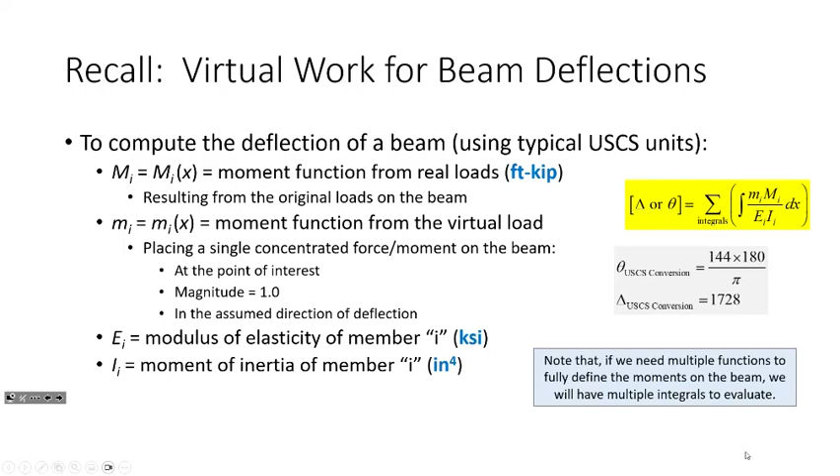Now just to make sure we're clear on the process: we're going to write both real moment functions and virtual moment functions for the entirety of the structure, and then sum up the integrals of little m times big M over EI. Last time we just had a single integral that we integrated across the entire span. That's not going to happen today—we're going to have multiple integrals we need to evaluate. The best way of learning how to do that is to just go through a problem.

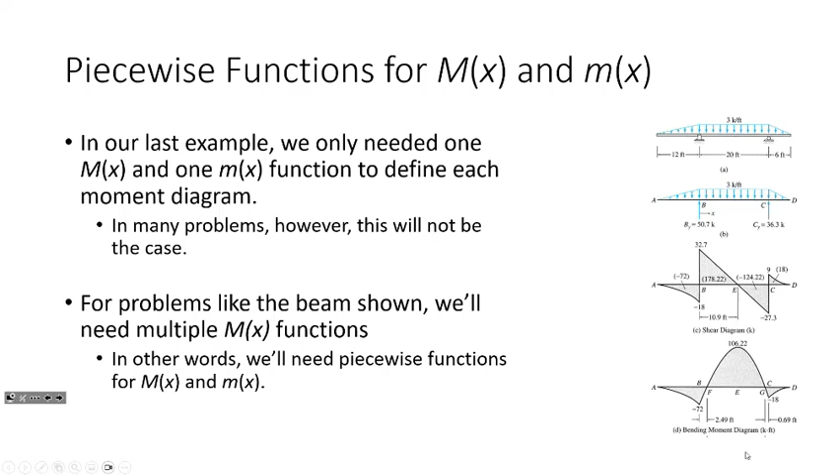You'll see what I mean today, like with this example. So speaking of, let's just get right into it.

Okay, so I have a fairly straightforward beam. I have a simply supported beam with a uniformly distributed load. I've given you the Young's modulus and the moment of inertia: E is 4,000 KSI and a moment of inertia of 6,000 inches to the fourth. We're talking about a beam that's probably a concrete beam, 4,000 KSI Young's modulus, so what is it, 57,000 square root of FC prime? Are y'all doing that in 321 yet? So you've seen that formula before. So about 4,000 KSI for E, 6,000 moment of inertia, and we have 1.2 kips per foot over a beam that's 30 foot long.

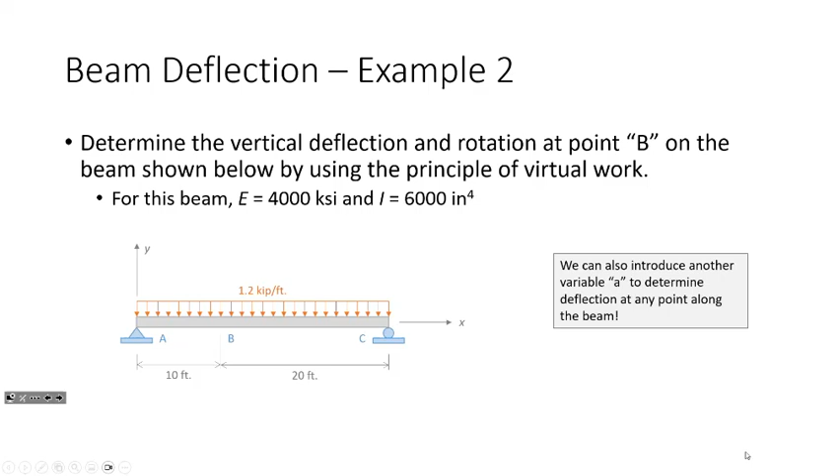So just making sure we're on the same page, how many real moment functions will I need to fully define the moment diagram? One, right? Because if I cut a section anywhere and look to the left, I have a distributed load and a reaction. So we're only going to need one real moment function, but that's not going to be the case with the virtual functions. Let's get right into it.

And I've got a couple things open here down below, and I'll explain all this stuff as we get into it.

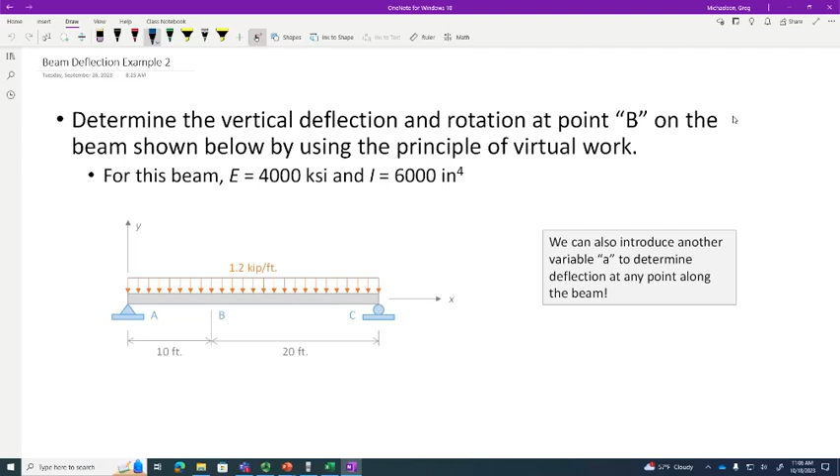Okay, so the first thing that we'll do is we'll handle the real structure. And the first thing that I would suggest is going through and doing the structural analysis normally, drawing the shear diagram and moment diagram graphically, so you can get an idea of what you're looking at. I think that's really important.

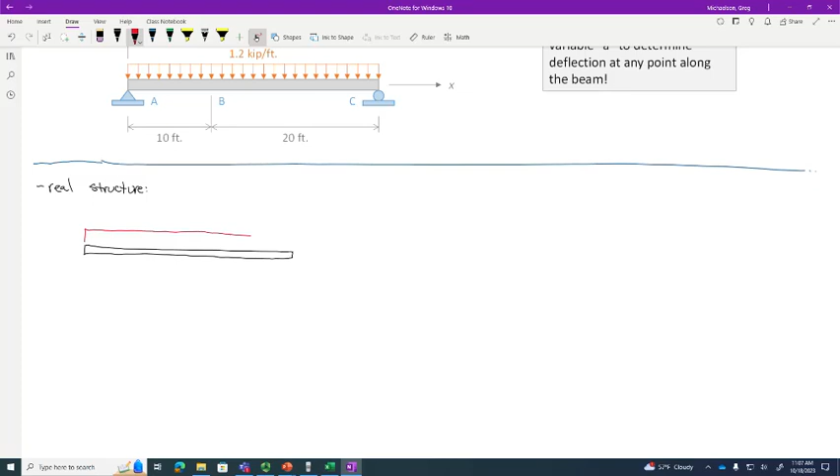So we've got a simply supported beam with a uniformly distributed load, 1.2 kips per foot. We have a hinge support and a roller support. Now, how many vertical reactions do I need to solve for? Two, right? One here and one here.

Can somebody tell me a characteristic about these two reactions? They should be equal, right? This is a symmetric structure. We're going to talk on Friday about exploiting symmetry and how it can make your life a lot easier when doing virtual work problems. But the point is, this is a symmetric structure, so these reactions should be equal.

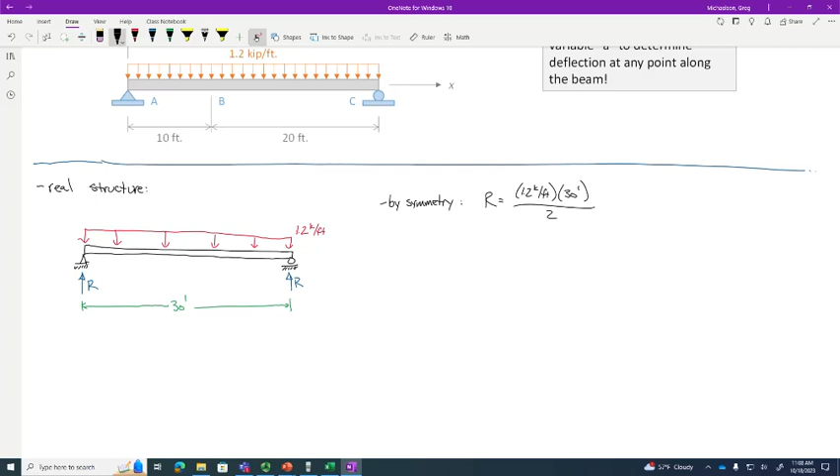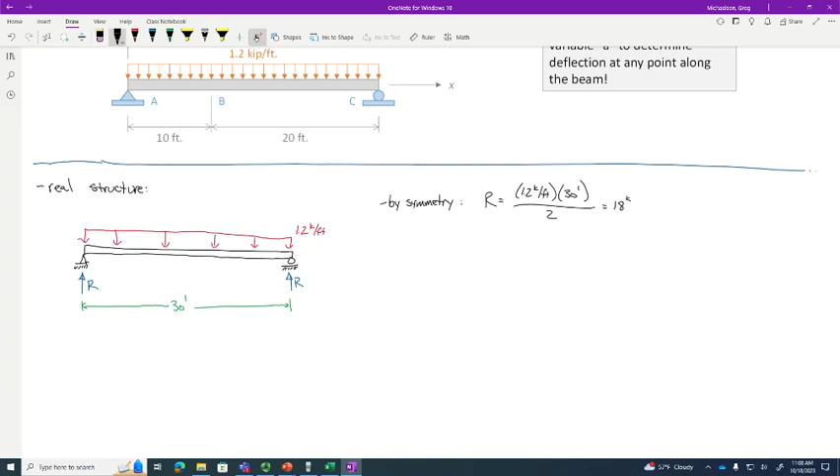Can anybody tell me how much the reactions are if this is a 30-foot long beam? It's 30 feet because if we look here, 10 and 20, so the beam's 30 foot long. How much are the reactions? 18 kips. Do I have a second on that? Yes, because by symmetry we can say the reaction is 1.2 kips per foot over a distance of 30 feet, and then we cut that in half, so that's 18 kips. That should be easy at this point, right? We haven't really done problems like that before, we've been pretty formal about it, writing our equations of equilibrium. But we are engineers, and just using your engineering judgment, that's going to be 18 kips.

So now I'll put 18 kips, 18 kips. Let's go through and draw our shear and moment diagrams.

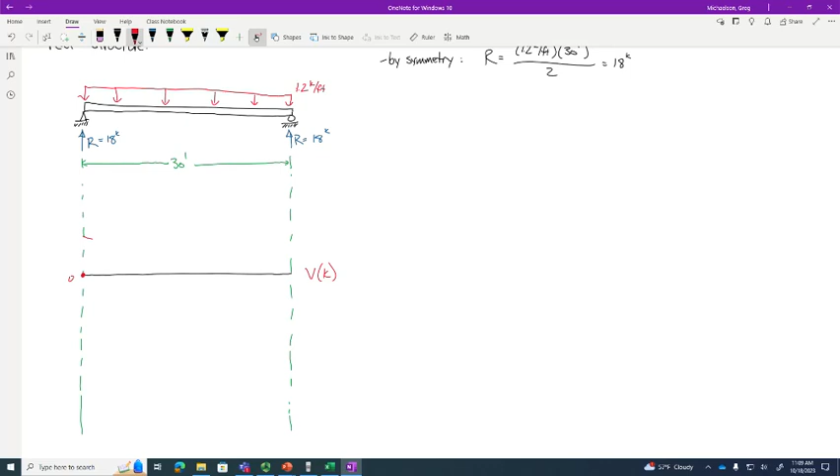So somebody tell me the shear diagram. If I start at 0, what does the shear diagram look like graphically? What's the first thing I do? 18. And then what's it going to look like from 18 all the way over here? It'll be sloped down to negative 18 and shoot back up to 0. Exactly right, so it's going to look something like this, 18, negative 18, and then shoot back up to 0. Just so we're paying attention, what's the slope of that line? There you go, 1.2.

If the beam is 30 foot long, how long is this? 15. So if that's 15 feet, what's the area under the shear diagram? What are the areas of these two triangular regions? 135. Do I have a second? Yes. So this is plus 135, this is minus 135.

So that means our moment diagram, what is it generally going to look like? A parabola opening downwards, right? It's going to open downwards and peak right here, because it's going to go a lot to a little, little to a lot. It's just going to be one big parabola that peaks right here. How much is that peak? 135. So our moment diagram is going to look something about like this, starting at 0, something about like that.

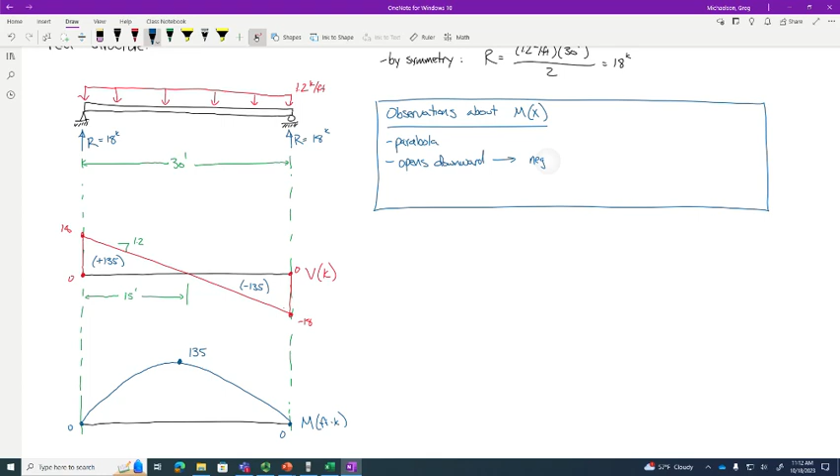First off, I think we can say it's a parabola, right? We can also say it opens downward. What does that mean? That means we're going to have a negative x squared term in it, right? Is everybody okay with that?

How about this? Let's just abbreviate that. How about that the function has to equal 0 at x equals 0 and x equals 30, right? The other thing is we know m of 15. That's going to be m max, and it's also going to equal 135.

So I didn't derive any equations, no x's yet, no cut sections. I'm just looking at the structure, looking at my moment diagram, and making some common sense observations. Everybody with me on that? And maybe one other point I would mention is it's a single moment function.

All right, so now let's cut a section. I'm going to cut a section and look to the left. Now I'm going to make a note about something. One of the things I was very fast and loose about is I didn't draw my coordinate system. I gave you the coordinate system on this problem, but on the homework assignment I'm giving you, it's not given. So you're going to have to figure that out.

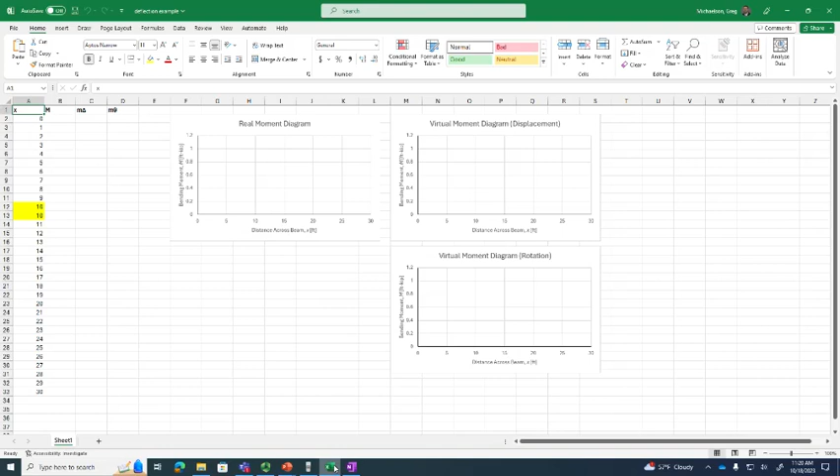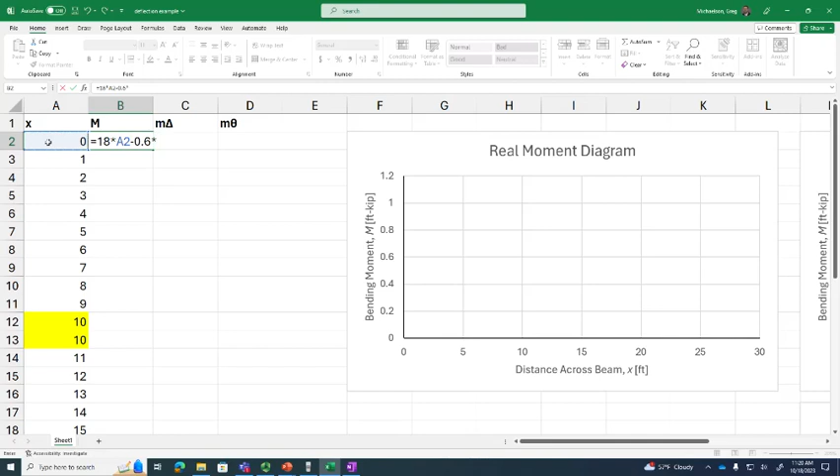Let's start plugging and chugging. So what did we say? We said m equals 18 times x minus 0.6 times x squared. And then, come on, boom. Does that look right? Well, we've got a 0 here, a 30 here, the max at 15.

What is the value at 15? It's 135. Everything's looking like it's making sense, right? You got this wonderful little tool, make sure that you avail yourself of it. Okay, does that make sense?

So now we have our real moment function. I'll put it up here on the board. So we'll say that m of x is 18x minus 0.6x squared. We evaluate that from 0 to 30.

Okay, so now we're going to do little m of x. Now what I'm going to do is I'm going to call it little m delta, because the problem, we're finding two deformations. We're finding a displacement and finding a rotation. So if we go back to the problem, what did the problem say? We're going to try and determine the vertical deflection and rotation at point B on the beam shown using the principle of virtual work.

So now what we're going to need to do is a virtual analysis. Let's do the deflection first, the vertical displacement first. So we'll find these m deltas. The way that works, we kick all of the original loads off the structure, and we replace it with a single unit load in the direction of the assumed displacement. On this structure, which way do you think B is going to deflect, up or down? Down. So we're going to do our virtual structure like this.

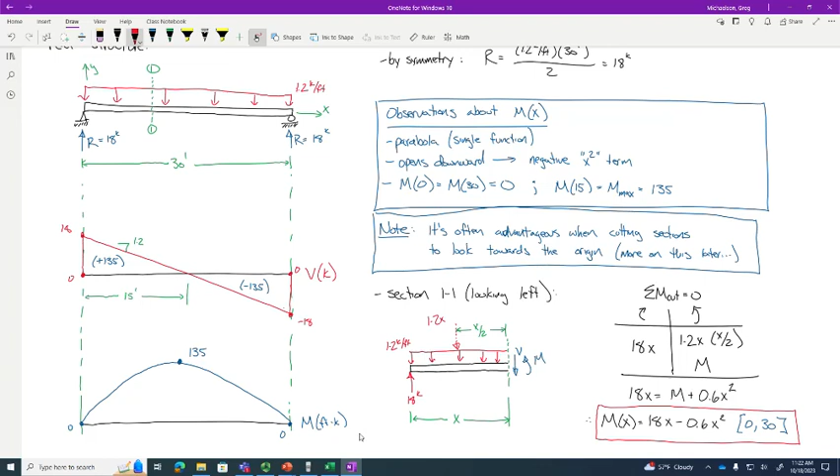So let's go back to this. Does everybody have all this written down? Okay. So now let's go a little further. All right. So, vertical or virtual structure. Now let's do vertical deflection at B. Okay, so we've got a structure that looks like this.

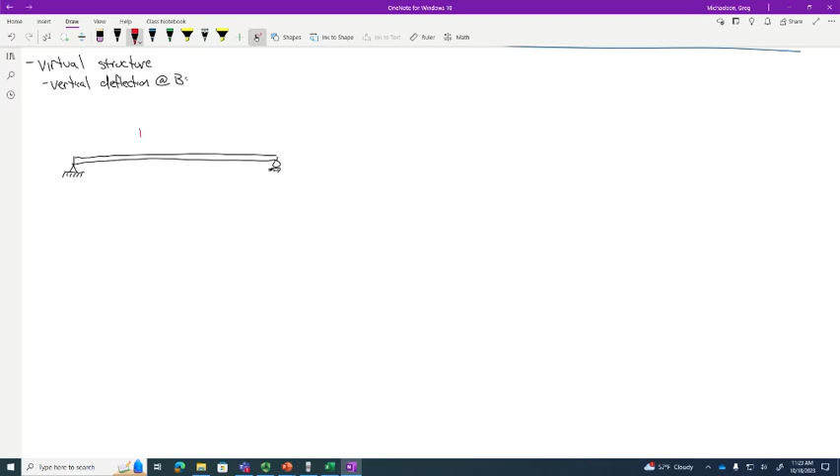Oh, I can do better than that. We've got our support here, and B was about right there. That's where point B is. And we replace that with a single unit load. So if you want, you can think of it as like a one kip load. Really, it doesn't have units, but if you want to think of it as one kip, that's fine. We have a one kip load, and that is placed such that this is 10 feet, and this is 20 feet, right? So this is my x-axis, this is my y-axis.

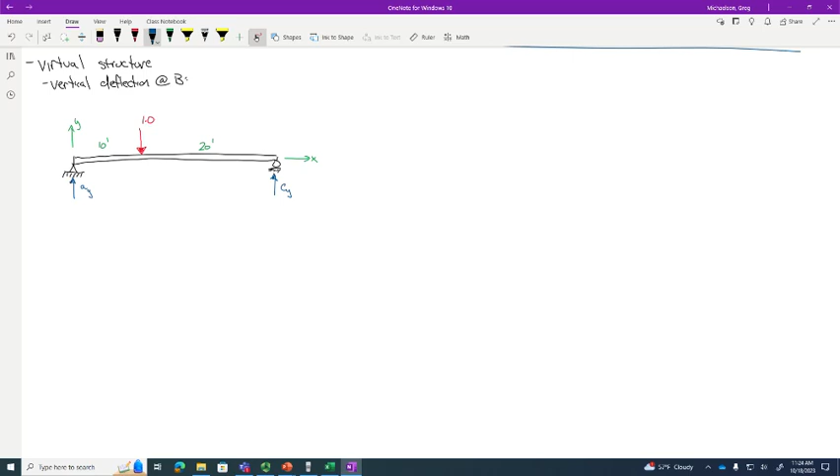So we're going to have a reaction here and a reaction here. Maybe what I'll do is I'll call this AY and CY, but I'll use lowercase letters because it's sort of a virtual structure since we're using lowercase for everything. So what I'm going to do, the way I'm going to handle this problem is I'm going to draw the shear and moment diagrams graphically. Okay, so first thing I need to do is I need to compute the reactions. So I'm going to sum moments at A.

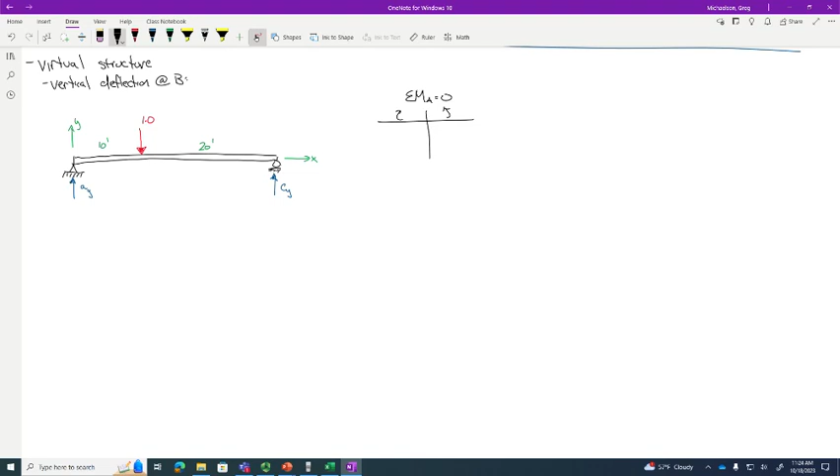Okay, so if I sum moments at A, what do I have? I've got 1 times 10, and I've got CY times 30, right? CY times 30. So I've got 1 times 10 feet is CY times 30 feet. Is everybody okay with that? So 10 feet is CY times 30 feet. So CY is a third, right? Did I do that correctly? So a third, okay, so we'll say CY is a third.

So equals. So if I sum forces in the y direction, y'all help me out, what is AY? There you go, AY is 2/3 going up. And again, it's not 2/3 kips, it's just 2/3. Again, if you want to think of it as a kip, that's fine, but it technically has no units.

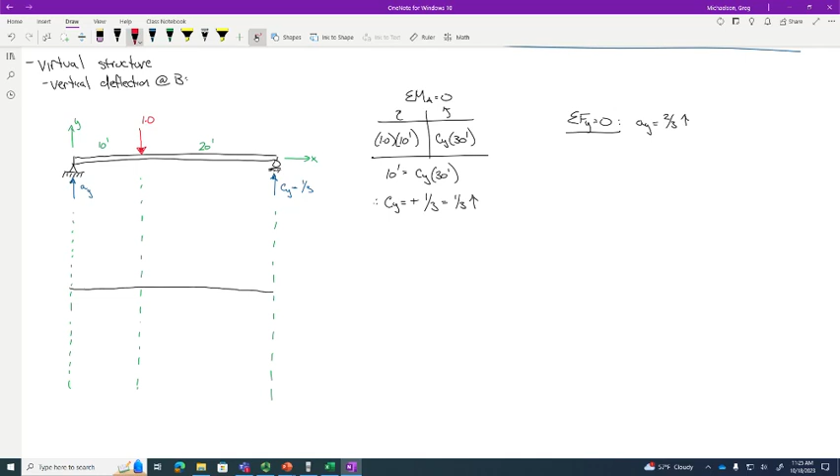So now what we're going to do is graphically construct our shear and moment diagrams. So let's start off with the shear. So the shear doesn't have any units. So we start out at 0.

So somebody tell me what to do. Start here, what do I do? Go up how much? Then what do I do from here to B? What do I do? Straight across, and then I go down 1/3... negative 1/3, then over to C, and then back up, right? So our shear diagram should look something like this.

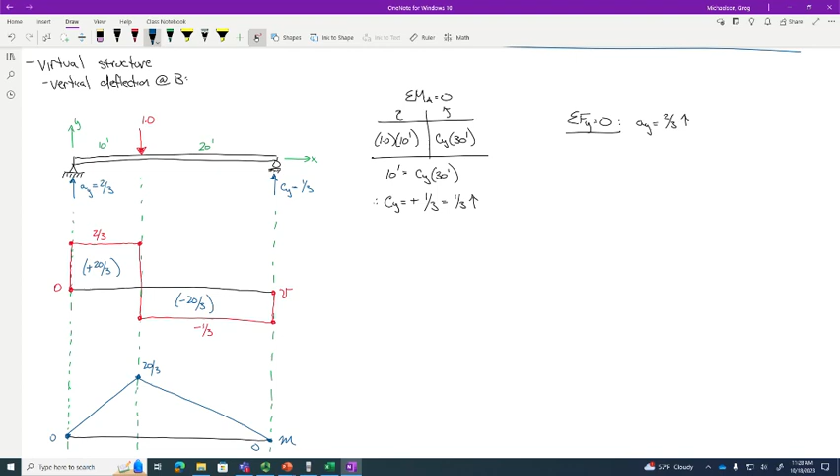Okay, so with that, I'm going to move these up a little bit.

Let's make some observations about M delta, just like we did last time. Last time we had a parabola that opened downward. Do we have that case here? So here what we have is a piecewise linear function.

And specifically, we're going to have two equations. We'll call it M1 from 0 to 10, and M2 from, sorry, not 20, 10 to 30. Does that make sense?

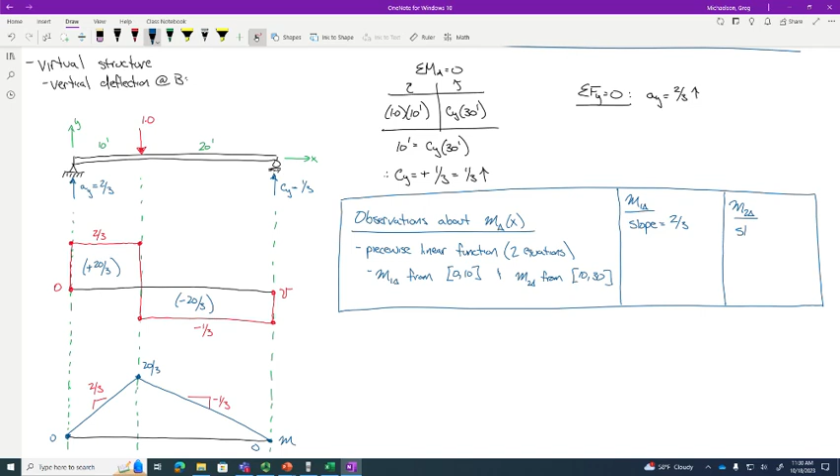So let's look at M1 and let's look at M2. What's the slope of M1? It's 2/3. The slope of this line is minus 1/3. Is that a fair statement? Okay.

Now, remember my coordinate system. What is a point that this line goes through? Give me a point that this line goes through, a simple point to deal with. 20/3, 10. Okay, 20/3, 10. What's an easier point? 0, 0. So what is the y-intercept of this line? 0.

So therefore, M1 is 2/3 x. Y equals mx plus b. That's the slope, that's the intercept. Y equals mx plus b. And this is from 0 to 10.

Okay, now this one. You mentioned 20/3 or 10 and 20/3 as a point that this goes through, but I kind of like dealing with zeros. Let's talk about this point. Is there a point that this one goes through that's easy to deal with? 30, 0. So this point goes through 30, 0. And so if you want, you can say, okay, y minus y1 equals m times x minus x1. Just sort of do that off to the side.

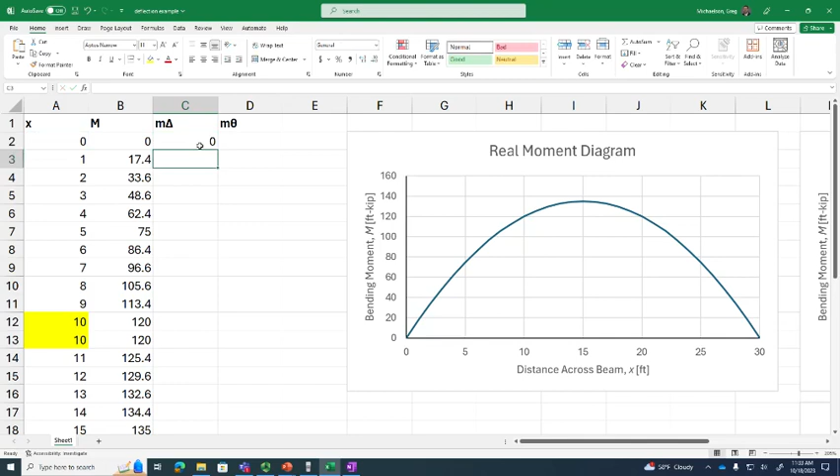So what we can do is we can write this as... make that a little better. Does that work? Do those equations work? Well, let's see. So we've got two-thirds times x. Zoom out a little bit.

So we're going to use that until we get right here. That one needs to go over there. So, and then here, 10 minus, like that, down. Okay, again right here we get the same value on both equations. So if we highlight this, this point's kind of special because with one equation and the other equation we get the same answer, but this is where the equations transition. Does that make sense? So we can graph it out and see that it makes sense.

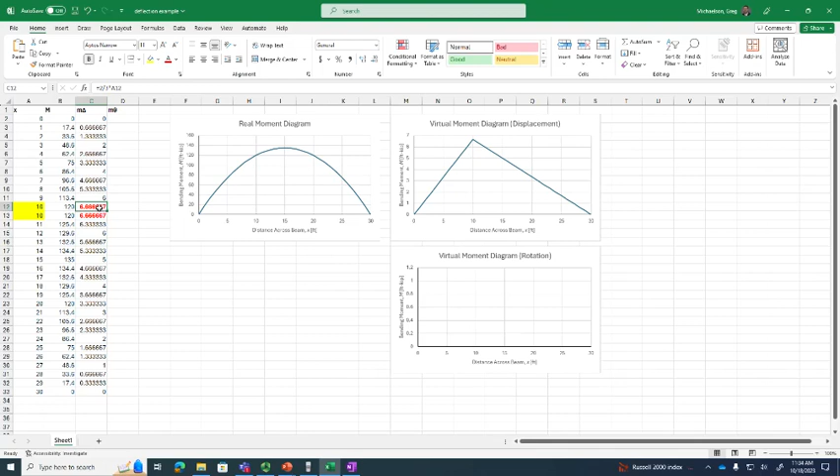Any questions? So now it's time to actually find a deflection. And so how do we do that? Well, we use the principle of virtual work.

Our principle of virtual work, we'll call it deflection at A, or sorry, deflection at B. We're finding the deflection at B, and we're finding vertical deflection. The principle says that we need to sum up our integrals.

But let's just make sure we understand what we're doing. What we're trying to do is sum up all of the stored energy inside the beam. Remember, virtual work is just a comparison between external work done and stored strain energy. So we need to sum up the little m times big M across the entire structure.

The problem is we have two little m functions. This little m function is only valid from 0 to 10. The big M works for the whole structure, but this one's only valid from 0 to 10, and this one's valid from 10 to 30. So the way we're going to have to do this is we're going to have one integral that goes from 0 to 10.

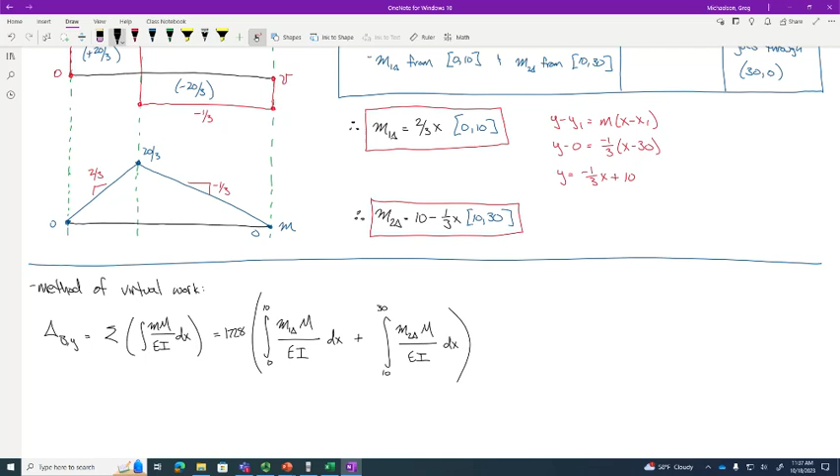So I've got 1728 over EI times an integral from 0 to 10 of 2/3 x times that dx, plus another integral from 10 to 30 of 10 minus x over 3 times 18x minus 0.6x squared, dx.

Now, my question to you as the class: let's look at this. That should not be anything you can't handle, am I right? And to be clear, I don't even really expect you to do that by hand. There's nothing to say you can't just... you have tools, use them.

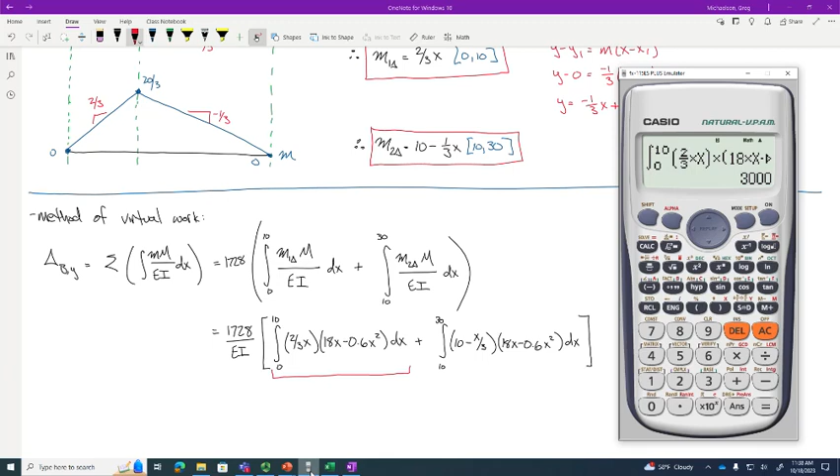In fact, for this integral, if you integrate from 0 to 10, 2/3 x times that, and plug and chug, you get 3,000. So this integral is 3,000. This other integral, I'll go ahead and tell you, ends up being 8,000 when it's all said and done.

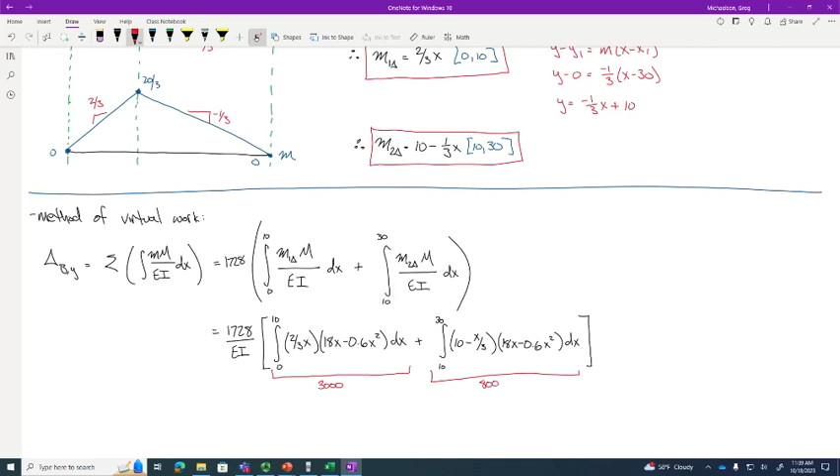So therefore, the deflection is going to be 1728 times 3,000 plus 8,000, all over E, which is 4,000, times I, which is 6,000. I'm being kind of fast and loose on the units, but we derived this unit conversion factor such that if all of our inputs were in our chosen unit system, the output would come out the way we wanted. So it kind of works out for us. When you chug this out, you should get...

0.792. So therefore, delta B y is 0.792 inches downward.

Okay, I want to take a step back. Let's digest what we've done here. Does anybody have any questions on this? Anybody have any questions?

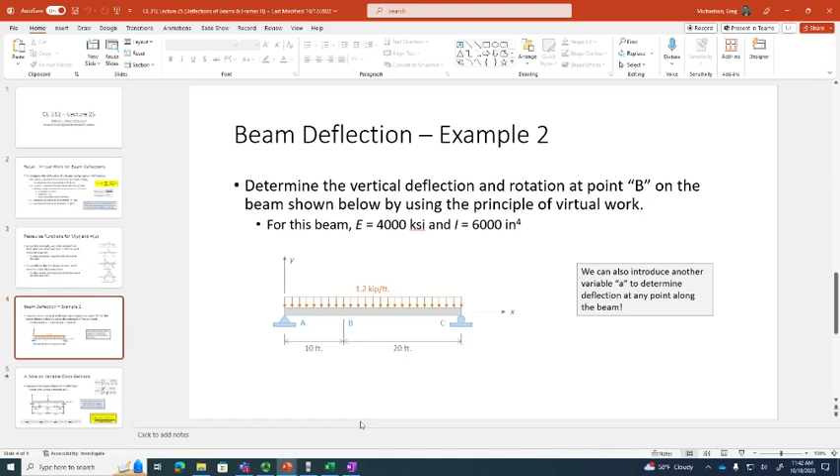So the idea is, here's what the beam used to look like, here's what it looks like now, so I'm proposing that it rotates like this. So what that means is when I look at my beam, I'm going to put a moment on the beam that looks like this. That's why I'm going to put the moment in that direction. So when I look at my virtual structure, let's draw that out right here.

So we'll call this the virtual structure. Let me go down a little bit. My scroll's not liking me.

Okay, so what I'm going to do is pick that point and put a unit moment. Now, to be clear, if you do this analysis and choose the wrong direction—like instead of having the moment rotate clockwise, you put it rotating counterclockwise—if you assume incorrectly, what's going to happen at the very end?

Say it again—you're going to get a negative answer, right? So if I'm putting it clockwise, and you put it counterclockwise, you're just going to get a different answer, or a negative answer. Doesn't mean the magnitude's going to be wrong, just a negative answer.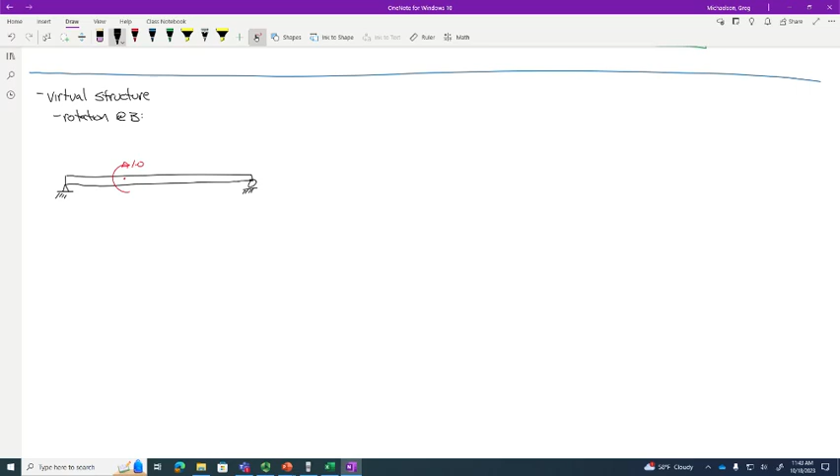Okay, so let me walk you through this one real quick. I don't think we're going to get to finish the problem, but I'll at least get through the difficult parts. Okay, so don't forget we've got our coordinate system right here.

And so, like last time, what I'm going to try and do is solve for the reactions. Okay? Now, I propose that the reactions are going to look a little different. I propose I'm going to have a vertical reaction right here going up, but I propose this one's going down.

And if you're wondering how I'm coming up with that—so I've got this moment. This moment is wanting to rotate the structure this way, so I propose the reactions have to rotate the structure the other way to keep it in equilibrium. That's kind of the idea. But if you don't believe me, let's do the statics, okay?

So let's recognize again, this is 10 feet, this is 20 feet—so 10 and 20, okay? So what I'm going to do is sum moments at A.

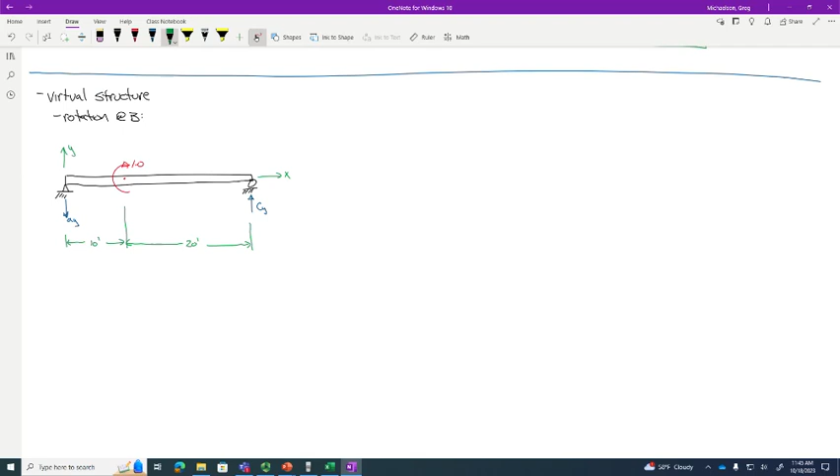So if I sum moments at A, I have this unit moment. So I have 1 times what? Nothing, right? It's a moment. You don't multiply it by a moment arm. You just do 1, right? Because you're just summing moments, right?

So I have 1 right here, and here I've got CY times 30. Now I'm putting it on the right side because here that moment rotates like this, okay? So I've got 1 equals CY times 30. So therefore, CY is 1 over 30.

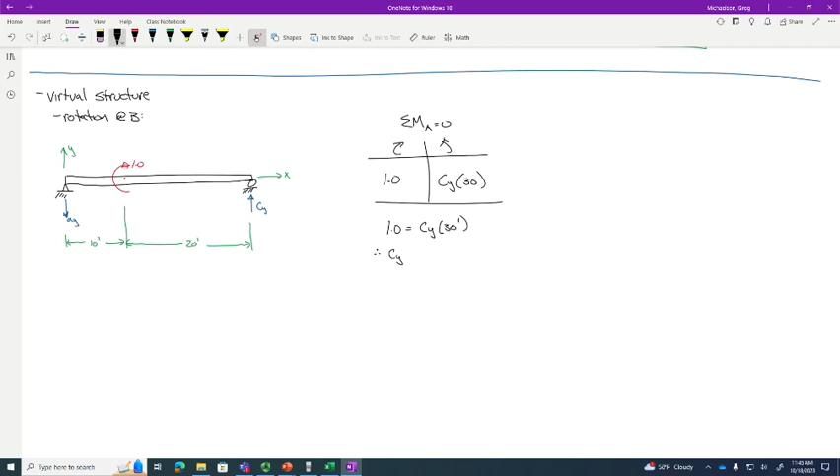So this is 1 over 30. But here's the thing—if that's 1 over 30 going up, what does this have to be in order to maintain vertical equilibrium? This has to be 1 over 30 going down, right? So that's where I have the two equal and opposite reactions.

So this is 1 over 30 going down. So here's what our diagrams are going to look like. Let's do that. So when I do this, we'll draw this line here too.

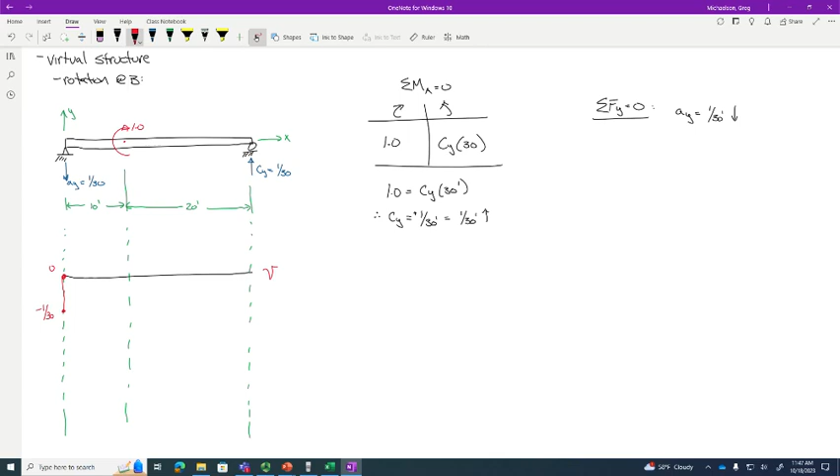So when I draw my shear diagram, what's going to happen is I'm going to start at 0, and I'm going to drop down to negative 1 over 30. But what's the shear diagram going to look like from start to finish? It's just going to be flat because that moment does not affect the shear diagram. Okay. All right, so far so good?

Now, I am going to break this up into different segments so that we can negotiate this. This is going to be negative 1/3, this area, and this one's going to be negative 2/3. So what I'm doing is splitting it up along that line. So the total area under the shear diagram is negative 1, right? So that moment has to cause a sudden increase of 1 in order to get us back to 0.

See, my moment diagram is going to look like this. So I'm going to start at 0, drop down to negative 1/3, shoot up to positive 2/3 because that's where my concentrated moment is, and then go back down to 0. Okay? And by the way, what's the slope of these lines?

Negative 1/3. Negative 1/3 or negative 1 over what? 1 over 30, right? It's the shear diagram, right? So this is negative 1 over 30, and this is negative 1 over 30, okay?

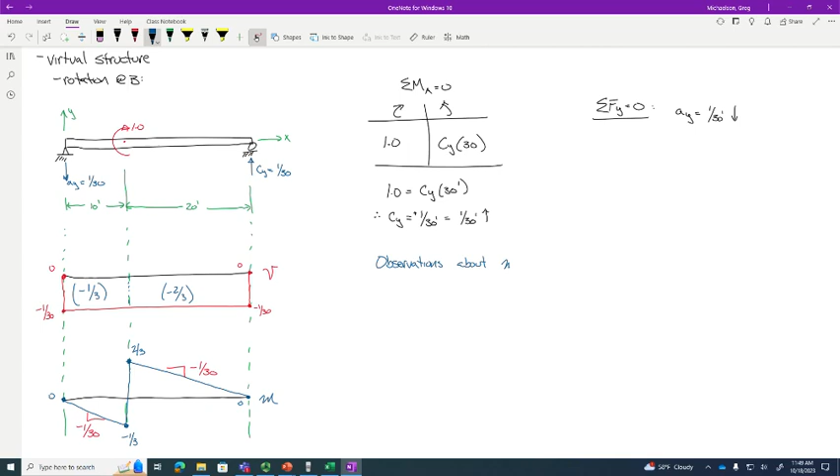So just to bookend this—and I don't think we're going to finish the example today, but I think we'll be able to at least make our observations—so just like last time, we're going to have piecewise linear functions. We're going to have two equations: M1 from 0 to 10, and M2 from 10 to 30.

Now, we're not going to be able to finish this today because I'm not going to try and keep you over too long, and I don't want to rush this. But if you're interested in toying around with this on your own, what I'll tell you is that this one ends up being negative 1/30 x.

This one ends up being... let's see, 10 minus x over 3, I think. Yeah... or no, there's a—no, this is 30, x over 30. Long story short, the theta is 0.224. But we'll finish this next time.